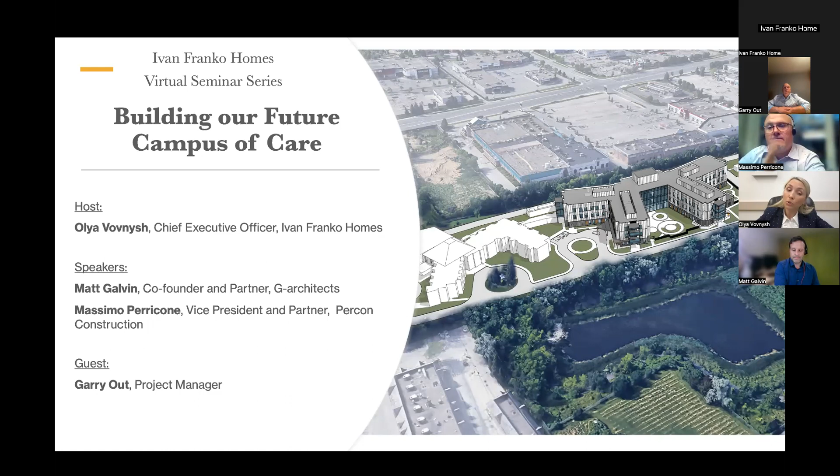So, building our future campus of care. As many of you probably know, we are planning to have a groundbreaking ceremony for the new campus of care next month, on October 27th. We've seen a lot of interest in the community about our project. People want to know how we got to this point. So we decided to hold this session and share the latest information with you.

Our board, chaired by George Rohota, our building committee, and the whole team of professionals have been working very hard over the past 5 years to bring the campus of care vision to reality and ensure that the best care environment can be built for seniors in our community. A number of companies wanted to work with us on this project, and we chose the best ones.

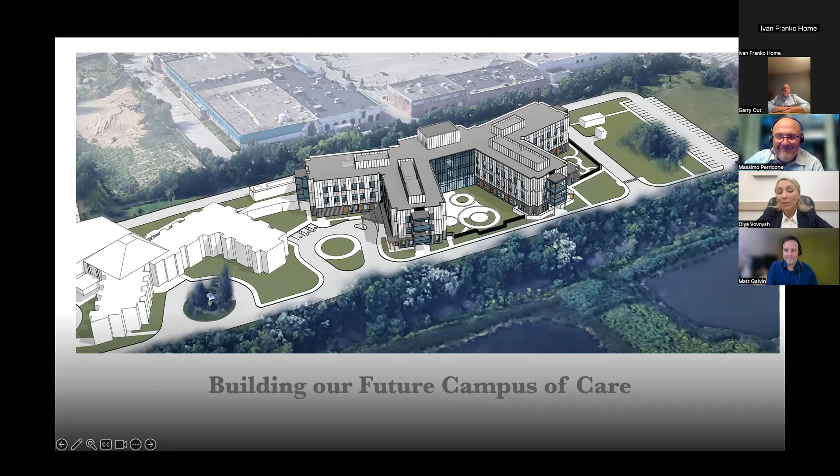I am pleased to introduce our speakers to you. Matt Galvin is the co-founder and partner of G-Architects and specializes in design for aging, with particular focus on long-term care. He recently led the development of 1,344 long-term care beds through the ministry's enhanced funding program. Matt's extensive experience spans 5 Canadian provinces, and he brings innovative concepts and best practices from one jurisdiction to another. Matt and his team at G-Architects are dedicated to understanding their clients and the challenges they face. They are sensitive to the fact that a long-term care home is a building where people, such as staff and residents, live or spend a huge amount of time, and they always look for design ideas that can enhance the quality of life for residents, staff, and visitors.

Welcome, Matt. Also with us today, we have Massimo Perricone, co-owner and vice president of Percon Construction Inc., a construction management company with over 25 years of experience that has successfully delivered over 170 projects. The company has significant construction expertise across multiple sectors, including public sector facilities, community centers, hospitals, healthcare facilities, long-term care homes, and assisted living facilities. Massimo, together with his brother Frank, are known for their hands-on, collaborative, and cooperative approach, partnering with their clients to assist them in realizing their project vision and objectives.

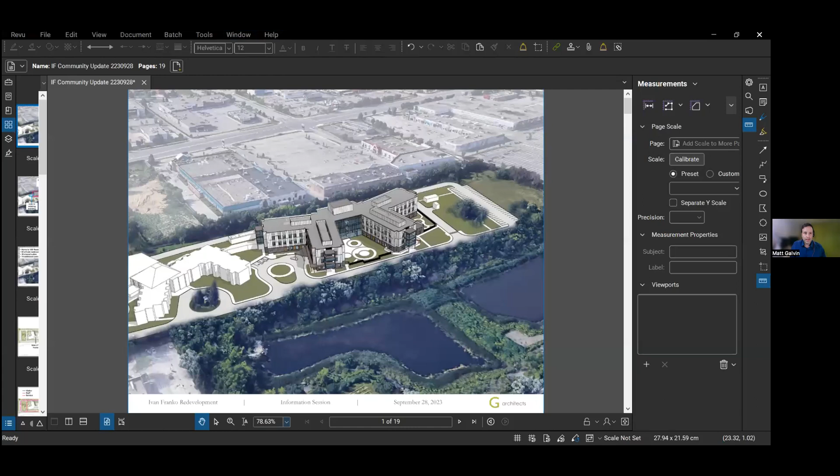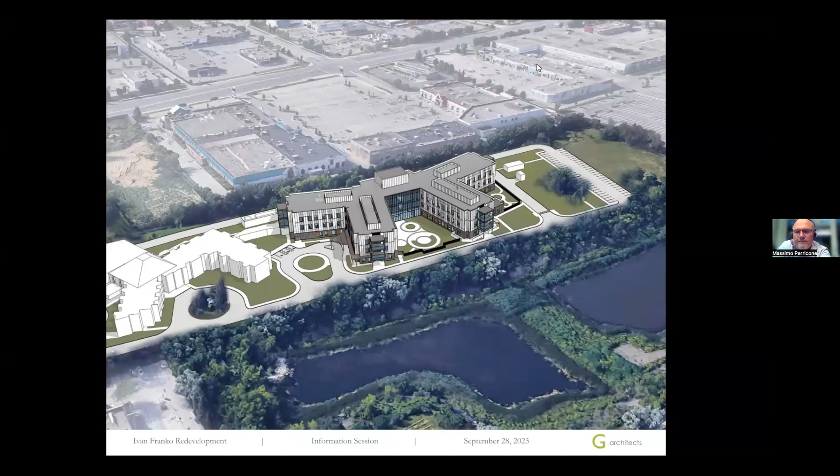Thank you, Olya, and thank you for that kind introduction, and good evening, everyone. I'm very happy to be here tonight to share some information about the project. Bear with me one second as I share my screen. Is that working for everyone? Yep, excellent. Thanks, Mass. Okay, so we're here tonight to share some information about the design and the process and the journey that we've been on working with Ivan Franko to get us to a new long-term care home for the campus.

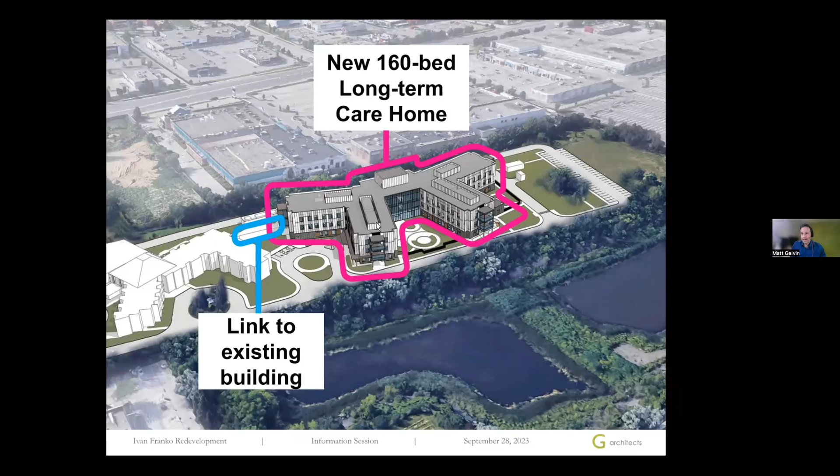This image that we're looking at is the future of the back half of the Winston Churchill site. Just on the left-hand side of the page, you'll see the existing assisted living building. This is the drop-off area at the front of that building. What we're here to talk about tonight is the design and the construction of the new 160-bed long-term care home, which will be connected to the existing building by a physical link and located in the back part of the property.

It's going to be a home primarily for 160 residents, although it is a long-term care home. It's not a retirement or assisted living building. This is for licensed long-term care beds under the Ministry of Long-Term Care. There will be 82 private bedrooms and 39 shared suites, which would have 2 residents in each suite.

There are a number of very exciting design enhancements in this project that I'd like to share, but one of them is the quality of the 2-person rooms, which exceed the minimum standard of the Ministry of Long-Term Care. Each bedroom in a 2-person room, the sleeping area that a person has actually does feel like a private space. The 2 sleeping areas share a vestibule and a washroom, but there is a good deal of resident privacy and dignity even in those 2-person rooms.

As this is obviously intensifying the site with a lot of new residents, staff and visitors, there's going to be 74 additional parking spots added, and I'll show where those are happening just a little further into the presentation.

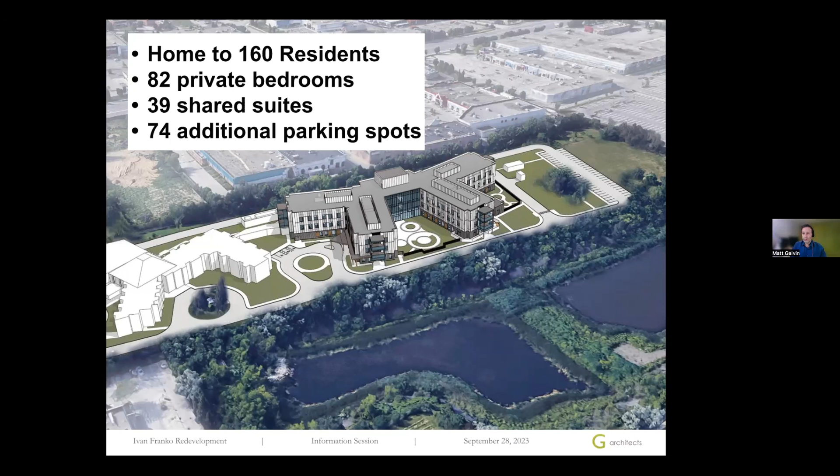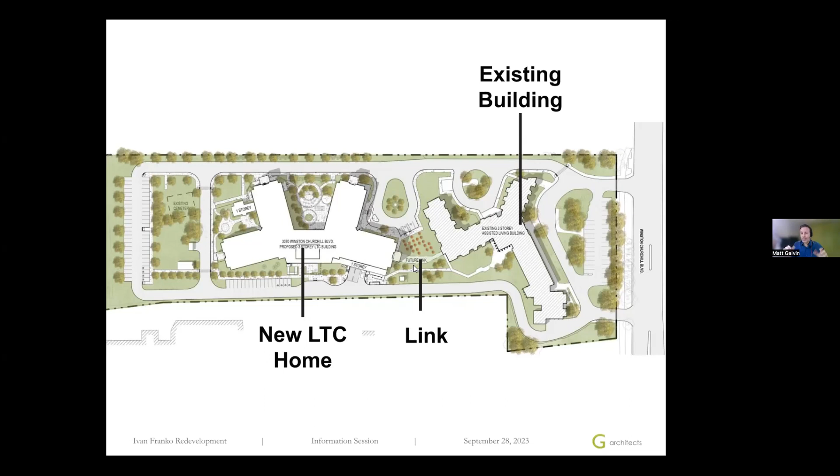So this is a site plan drawing, like we're flying in a helicopter over the new campus. Winston Churchill Boulevard is on the right-hand side of the page, and you can see the 2 roads currently there that access the existing building, and the new long-term care home at the back, connected to the existing building with a link. The link will be like an enclosed corridor, not just a covering, so you'll be able to walk from one building to another when completed.

So the proposal is to essentially build a ring road around both the existing building and the new proposed long-term care building. That'll work as a vehicle path, but it also creates a really great fire route to get firefighter access to all parts of the building.

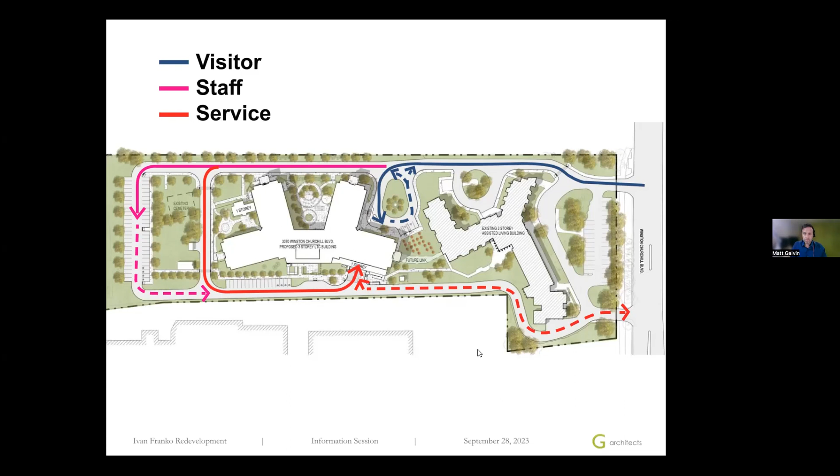So just zooming in a little bit on the outdoor space around the existing building, there's 3 main outdoor spaces. I already noted and talked a little bit about the drop-off area, where the canopy and the visitor drop-off loop is. There's going to be an opportunity there for a landscape feature in the center of that roadway.

A really positive design feature in the project is the large and very nicely landscaped secure resident outdoor space, which is right in the middle. That is a secure space in that we'll have a fence around it for the safety of residents, but it'll be accessible by all the residents in the home, and is accessed through the public space or the common amenity space on the ground floor of the home. We think that'll be a really wonderful space for the community.

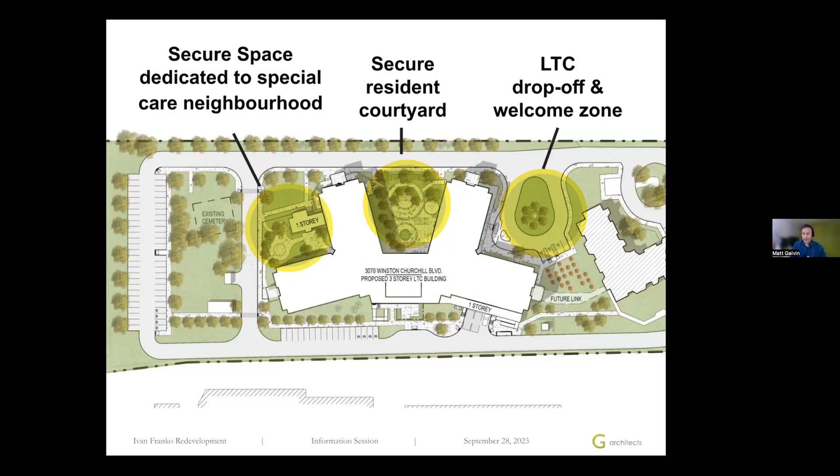And then there's another courtyard on the left side of the page, on the west side of the campus, another dedicated outdoor space for a special unit that is on the ground floor of the building.

So in very broad strokes, in terms of how the building is organized and what's inside the building, I mentioned that this is a long-term care building, which is very regulated by the Ministry of Long-Term Care. And typically you see neighborhoods or groupings of residents of 32 residents in a neighborhood. So the 160 residents of the new Ivan Franko long-term care home will be organized into 5 neighborhoods of 32 residents. On the second and the third floor, each of those floors will just be neighborhoods, with 2 neighborhoods per floor.

The ground floor will have a special neighborhood that will have special functions and special spaces to provide support to the staff and providing the specialized care in that unit. And the remainder of the ground floor is the staff and administration space, things like the kitchen and the laundry and the offices for all the staff who will work in the home, and the common amenity in the public zone. That's what I've identified in the yellow color on these simple map diagrams.

And you can see that the public zone goes from the front door, wraps around the courtyard and addresses the public courtyard. And then also there's a public path to the physical link that will connect to the existing building.

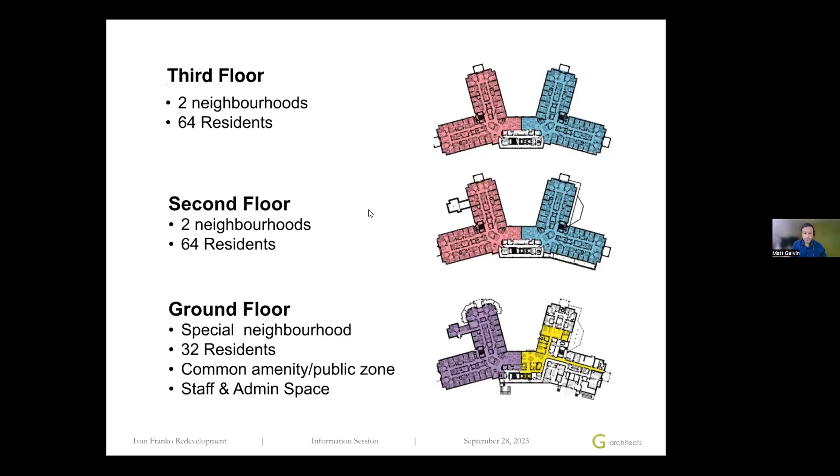Olia asked me to talk a little bit about how we got here, what the process has been, what the journey we've been on is. So I'll give a little bit of information about how we approached this project and what our process and our timeline was. And then I'm going to give a bit of a highlight reel of some of the exciting design features that made it into the project at the end of that design process.

And then we'll show some renderings that we can actually get a bit of a sense of what the outside of the building will look like.

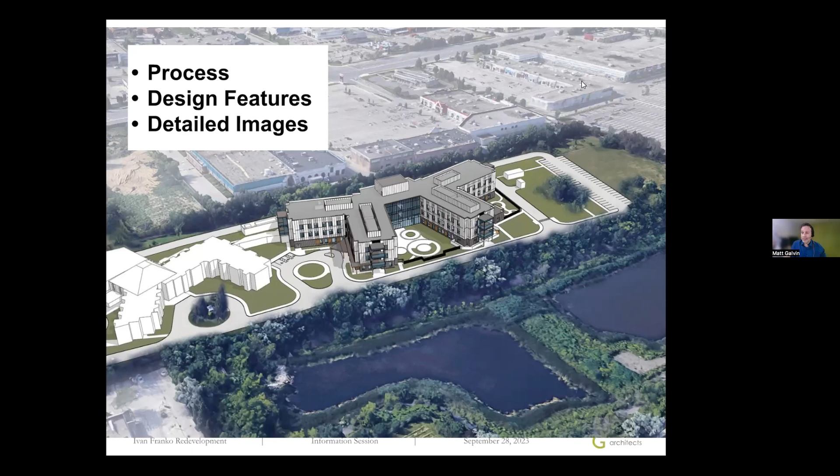So we joined the team in the spring of 2022. And at that time, we really began getting up to speed. The board of Ivan Franko had been doing a lot of work over the previous years, getting some conceptual design work done and some functional programming work done.

And the first thing we had to do was get ourselves up to speed on all that work that had been completed to date. And then we really set ourselves to working with the board and all of the staff to narrow down and identify what the real vision, the core vision of the project was, what the budget had to be, and what the key design features that needed to be preserved in the project were.

Our firm does a lot of long-term care design. And for me, that's actually my personal specialty and my passion. And we have a design process. While every home is unique and every project is unique, we do have a few key processes and principles that we believe are really important to design a building of this type.

And a big part of it is that we have to have a very collaborative process. That means working with the clients who are actually going to own and operate a facility for 40 or 50 years, providing care to the community. We really need to listen to those experts and listen to all the voices that have value to add to make sure that what we're designing is going to support what the community needs for 40 years.

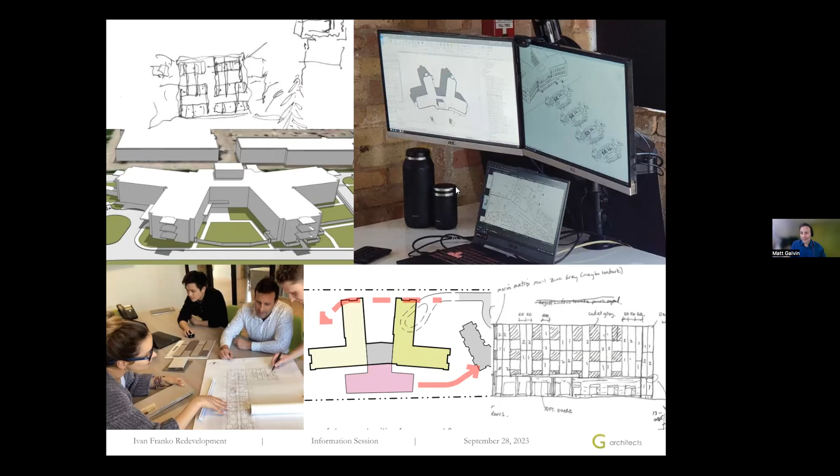We use a lot of different tools, and you can see how a project evolves from very simple diagrams to sketches, trying to imagine what it could look like, to a simple shape, and finally to a point where we have the building essentially in a 3D model inside the computer—a little version of the building.

So that's where we got to until the fall of 2022, and that's when the Ministry of Long-Term Care surprised the province with an enhanced funding policy that offered considerable additional funding for projects able to start construction in the summer or fall of 2023. That's when the team began a very intensive period to make sure we could achieve those timelines and take advantage of the additional funding.

So we then had to really work through a lot of approvals. That's a very important and very complex part of any construction project. The Ministry of Long-Term Care has all of its own approvals—we had to get through a series of design approvals from the ministry. And then not only the City of Mississauga, but also the Region of Peel, have a number of approvals we need to get through to reach completion.

This was also the timeline when we worked to bring Percon and Massimo to the team. We assisted the board in tendering the role of construction manager, because we knew with the timelines we were dealing with that we needed to bring a constructor into the team and work collaboratively with the time that we had to make sure we were going to come to a great result.

And I think we were all very delighted that Percon succeeded in that competitive process and has been a terrific partner in this process from the very beginning. Very enthusiastically working with us and understanding the challenges we had, that there was a firm deadline from the province to achieve additional funding. It's been a really successful collaboration thus far.

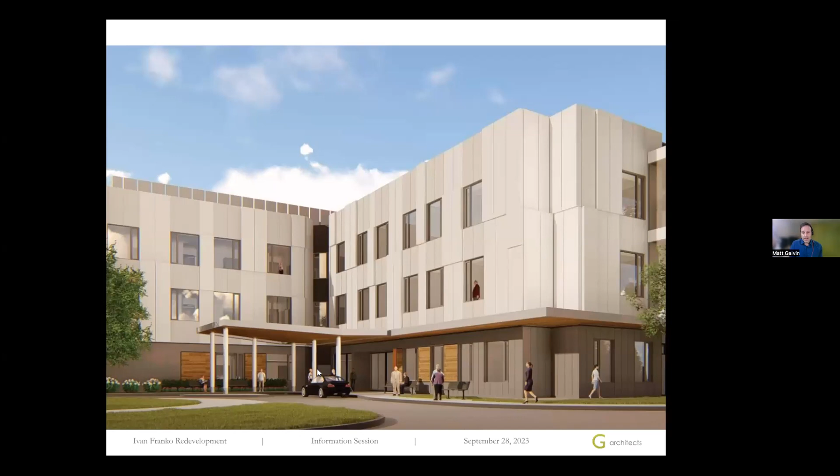And finally, before I turn the microphone over to Massimo, there's a few diagrams of the outside of the building. This is the welcome zone. You can see the covered vehicle drop-off where a car can slip underneath.

This is an image of the terraces that are at the end of each cluster of 16 residents. So each group of 16 residents gets to share an outdoor space, which is generous by common long-term care practice.

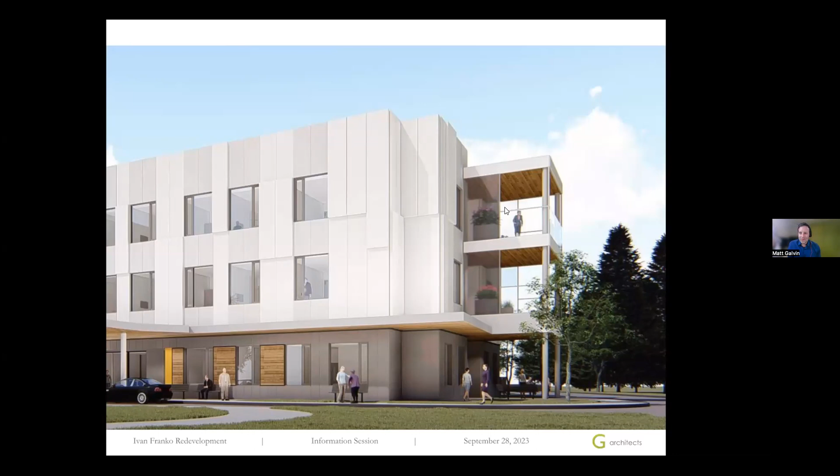And this is a view of the courtyard inside the security line. You can see it's going to be a very nice, bright, very accessible environment, very nice and safe. The thing that I really like about courtyards from an age-friendly perspective is the building itself actually provides a lot of windbreak and sunbreak. So it creates a microclimate that's really positive for elders.

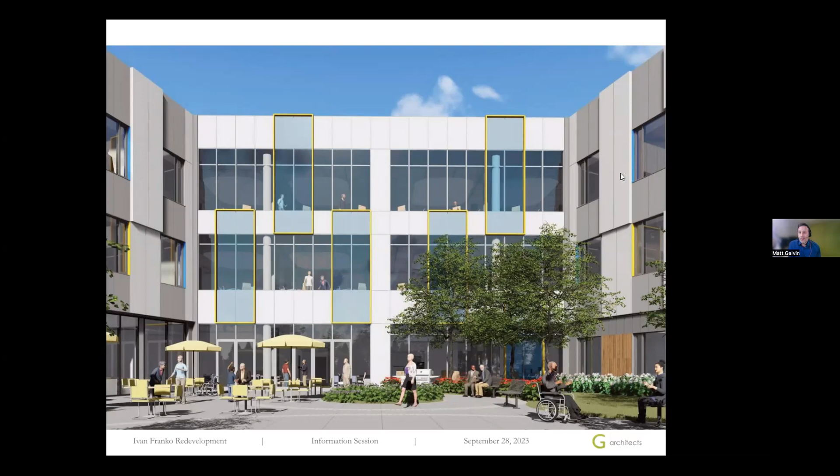Percon Construction, myself and Frank are very excited to be your construction managers and your partners throughout this journey. As Matt mentioned, we're excited to be working again with Matt.

We currently have over 800 long-term care beds under construction throughout Ontario. And what drew our office to this project is the location of the project. We've got staff that could easily manage this project, but it's very similar to a number of other homes that we've built over the last 25 years.

So currently, we've tendered all the trade packages. There was about 55 of them, and we've currently awarded roughly 55% of them.

And those are predominantly early works: civil, superstructure, and building envelope trades. Over the next 60 days, we'll work with Ivan Franko to make sure that we start tackling the interior finishes and ensure that all the wish list and the special products they want to incorporate into the building make it in.

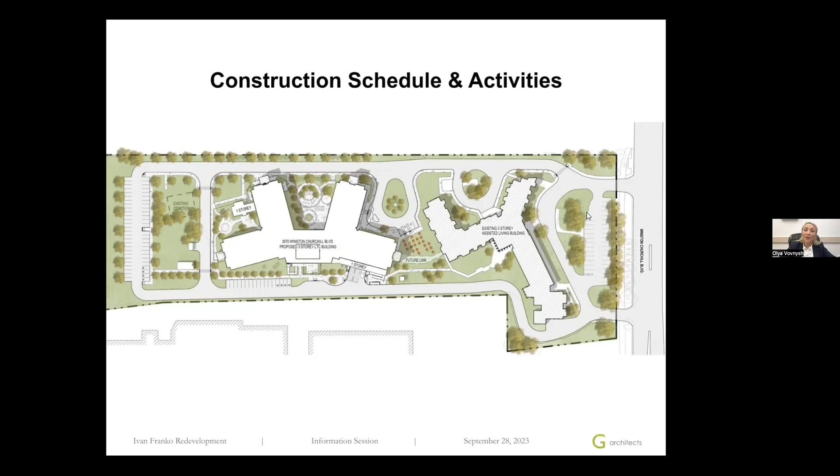Now I would like to invite Gary to moderate the Q&A part. I see a lot of questions for Matt. Gary, please. Perfect. Thank you, Olya. And thanks again, Matt and Massimo, for a very fruitful presentation and dialogue on the project. I myself, as a project manager, am also very delighted to be a part of the Ivan Franko team. It's a very exciting project. The community is really behind it.